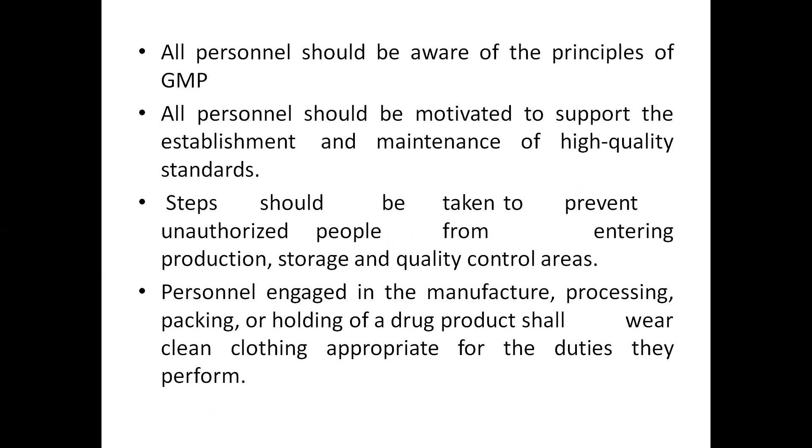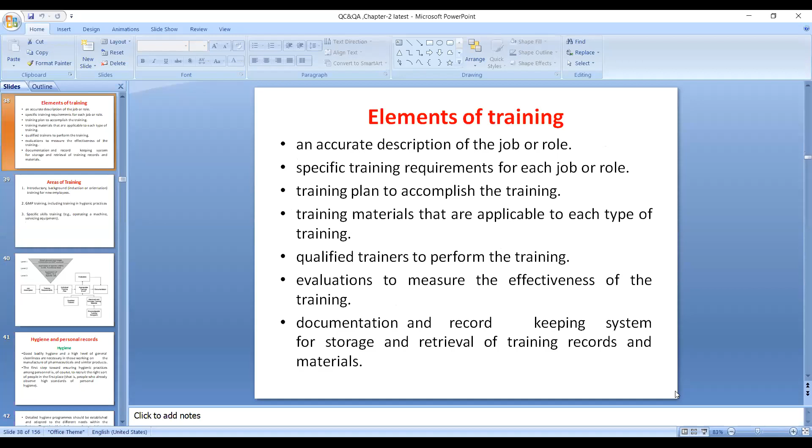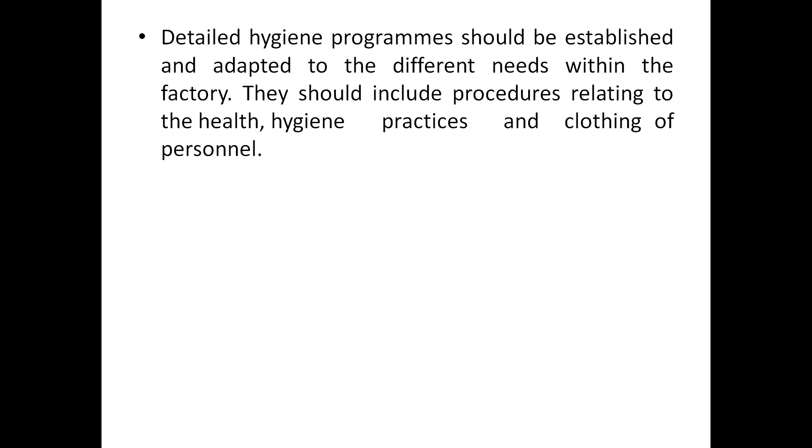A detailed hygiene program should be established and adapted to the different needs within the factory. It should include procedures relating particularly to health, hygiene practices, and the clothing of the person. Otherwise, if persons working in the pharmaceutical industry have any health issues, those things will interfere in the product also. That's the reason hygiene should be maintained.

Personal hygiene: all personnel who are working, prior to and during employment as appropriate, have to undergo health examinations, that means health checkups. Personnel conducting visual inspection should also undergo periodic eye examinations, not only other health checkups but including periodic eye examinations also.

All personnel should be trained in the practice of personal hygiene. A high level of personal hygiene should be observed by all those concerned with the manufacturing processes.

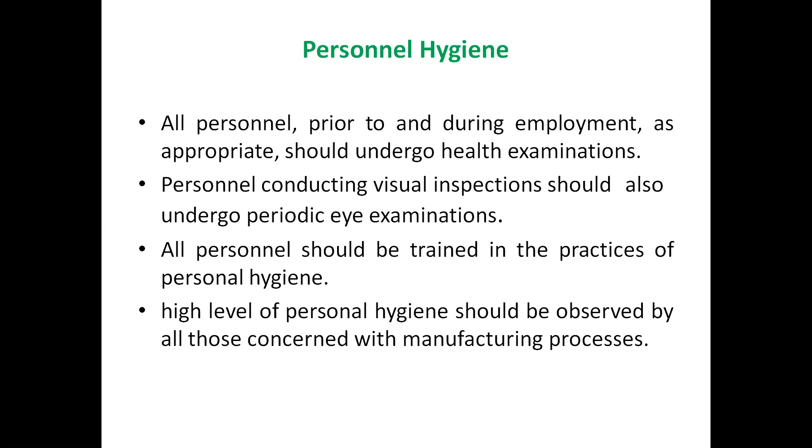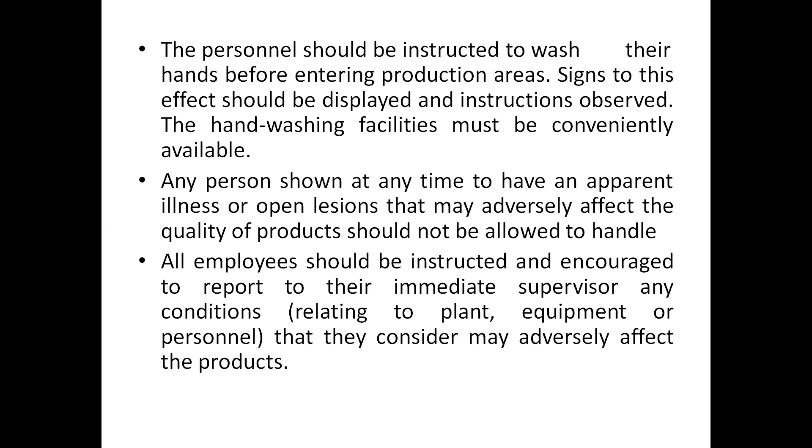Any person shown at any time to have an apparent illness or open lesions that may adversely affect the quality of the product should not be allowed to handle it. All employees should be instructed and encouraged to report to their immediate supervisor any conditions, relating to plant, equipment, or even a person, that they consider may adversely affect the pharmaceutical products.

Direct contact should be avoided between the person handling, that is the operator's hand, and the starting materials, packaging materials including primary packaging materials, and intermediate or bulk product. They have to avoid direct contact with the pharmaceutical products, packaging materials, the bulk products, etc.

They have to ensure protection of the product from contamination. Personnel should wear clean body coverings, appropriate to the duties they perform, including appropriate hair covering. Reusable clothing, if used, should be stored in a separate, closed container until properly laundered, and if necessary, should be disinfected or sterilized.

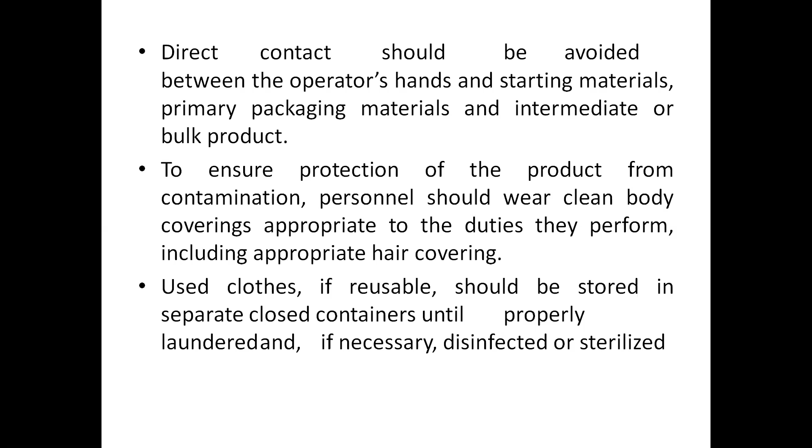This is very important for personal hygiene. Smoking, eating, drinking, chewing, and keeping plants, food, drink, smoking material, and personal medicines should not be permitted in the production areas particularly.

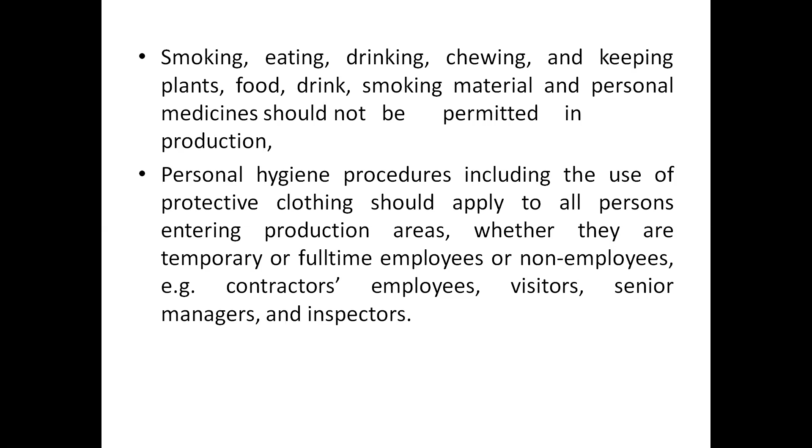Personal hygiene procedures, including the use of protective clothing, should apply to all persons entering the production areas, whether temporary or full-time employees or non-employees also. For example, contractors, contract employees, visitors, senior managers, and inspectors should all use protective clothing. It is applicable to all, not only the persons working in that particular area.

Hands, including nails, should be kept very clean and carefully washed after visits to the toilet. So hands should be clean for any person who is working; they should clean their hands, including nails, after visiting the toilet, before meals, before work commences, or when work recommences after a break. Every time there is a break, they have to maintain the cleaning process.

The necessity to observe good oral hygiene should also be stressed. Eating chewing gum and the ingestion of sweets or the like should be prohibited in the working areas.

Nowadays we are seeing many of them have the habit of eating something, chewing gum, or ingestion of sweets. Those things should be prohibited, particularly in the working area. The risk of contamination from nose and mouth can be controlled.

How? By not talking, you can control sneezing or coughing in the vicinity of the exposed products. Whenever products are exposed, the person working there should not cough or sneeze in that particular vicinity area. If they wear a mask, that's well and good. So the risk of contamination from the nose and mouth can be controlled.

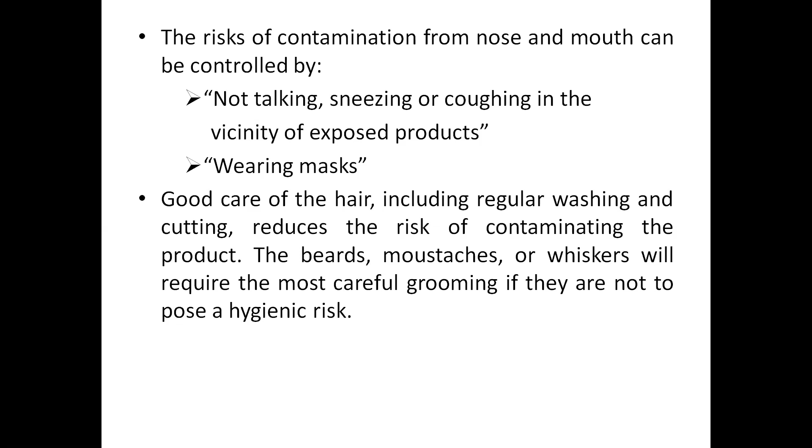Good care of the hair, including regular washing and cutting, reduces the risk of contamination. Even the person working should cut his hair, and also the mustache, beards, or whiskers. These require the most careful grooming if they are not to pose a hygienic risk, otherwise these hair things lead to contamination.

Coming to working clothes, particularly special protective clothing, it should be worn only within the designated work areas, not all areas. Even if you're going to the canteen, you should not wear it. Only in the designated work areas should you wear the working clothes or special protective clothing. The working clothes should be kept separate from the street clothes.

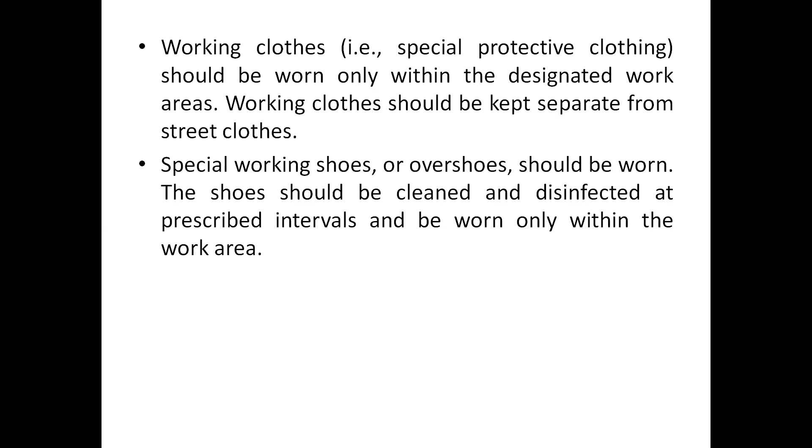Special working shoes, even overshoes, should also be worn in the industry. The shoes should be cleaned and disinfected at prescribed intervals of time, and should be worn only within the working area. Even if you want to go to any toilet, this should be avoided - it should also be within that particular work area.

Then coming to records - personal records. What records are required? Pre and post employment medical checks. That means before and after - whoever is employed in the industry, their personal record should be maintained. What minimum things are required? The pre and post employment medical checkups and even periodic checkups.

This is specifically important in case of eye checkups, skin and other infectious disorders - very, very important this point. And the personal training records also - not only health checkups, but personal training records on personal hygiene, good manufacturing practice, specific job training, motivation training, safety aspects, etc.

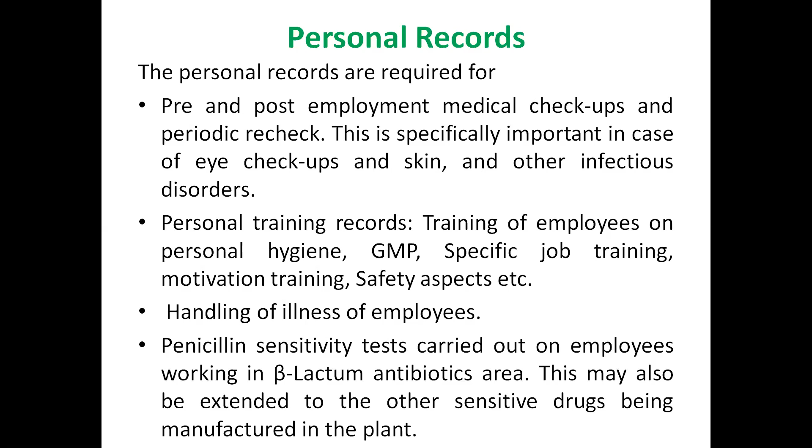So that's about the hygiene practice of industry persons. Now let us look into the drug industry location, its design, construction, and the plant layout. Premises must first be located, and they have to be designed, constructed, adapted, and maintained to suit the operations to be carried out.

Any building or buildings used in the manufacture, processing, packing, or holding of drug products shall be of suitable size, construction, and location to facilitate cleaning, maintenance, and proper operation.

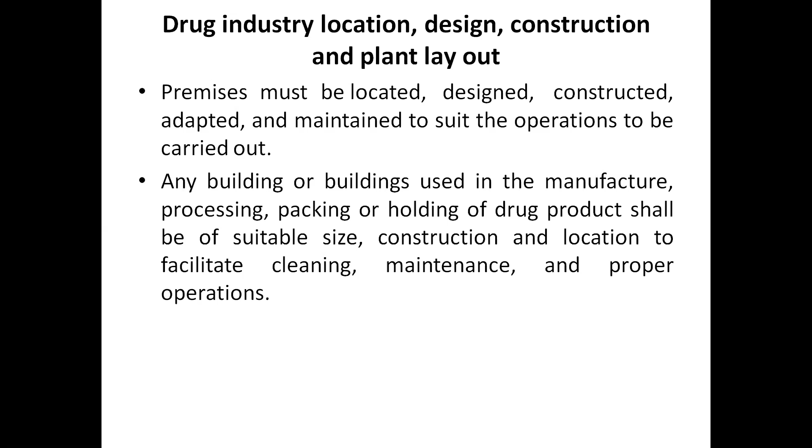Then the location of the drug industry. Selection of location for a drug industry is a very, very important decision - a vital decision because it determines the balancing of investment as well as profit. So the plant should be located where the minimum cost of production and distribution can be achieved.

Because if the plant is some 300 kilometers away from the city, distribution and transportation will cost more, and the profit margin will be less. It shall not be adjacent to an open sewage or drainage area or public toilets, and shall not be adjacent to any factory which produces disagreeable or obnoxious odor or fumes, or emits large quantities of dust or smoke.

So these are the few restrictions and prohibitions for the drug industry location. Otherwise, those things contaminate the product quality.

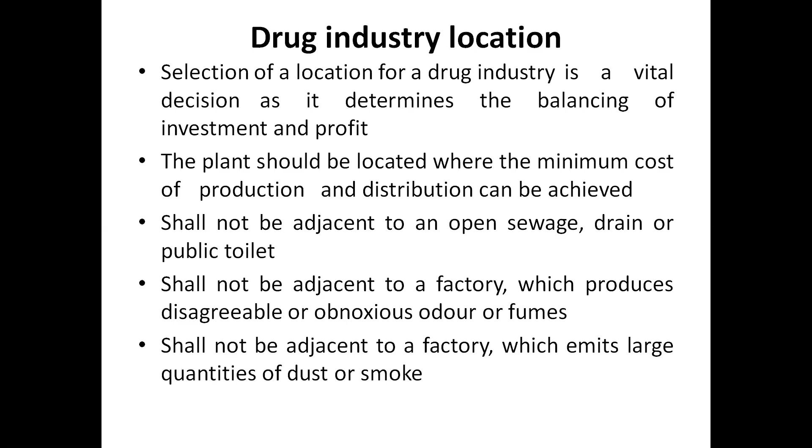Then what are the minimum requirements? It should have adequate space, sufficient even for future expansion if needed, and regional laws should allow anticipated development while restricting undesirable developments.

Then the availability of water is very important, both quality and quantity, and power. Fuel, sewage, and waste removal are also quite important requirements for any drug industry.

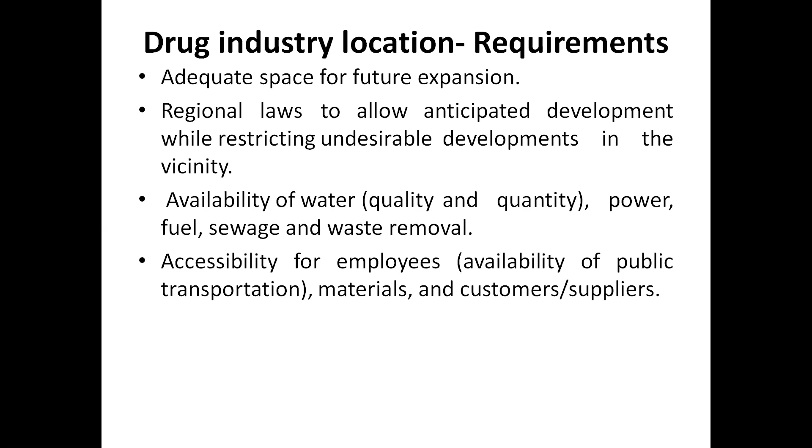And the accessibility for employees, meaning the availability of public transportation, materials, and customers or suppliers. This makes sense so transportation can be minimized, and suppliers and customers can easily approach and reach the site.

The most important is environmental issues such as site history, soil, water, air quality, geological and topological issues, and the potential for flooding, earthquakes, or foundation instability. They should look into topological and geological issues as well.

Then the proximity of undesirable activities that pollute or act as a source of vermin, insects, odor, or microorganisms. Other industries, disposal sites, or open mining should also be taken into account.

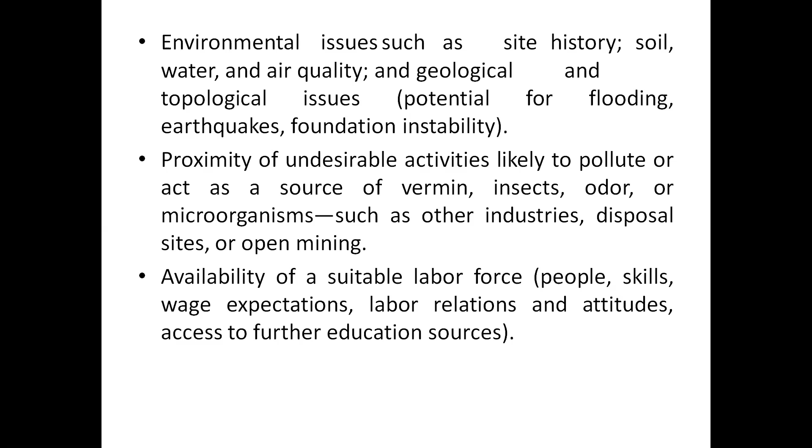The availability of suitable labor force: people, skills, wage expectations, labor relations, attitudes, access to further education sources, and also the ability to provide adequate security arrangements.

Proximity or accessibility to related operations in the company or industry, and marketing, internally produced intermediates or components. For example, R&D should have accessibility, as well as marketing and internally produced intermediates or components.

Then the political situation: government stability, trade policies, taxation, financial incentives, etc. That should also be looked into.

Then factors that influence the location. The primary factors include availability of raw materials, and market for products. After producing products, you have to market them - that is market for products.

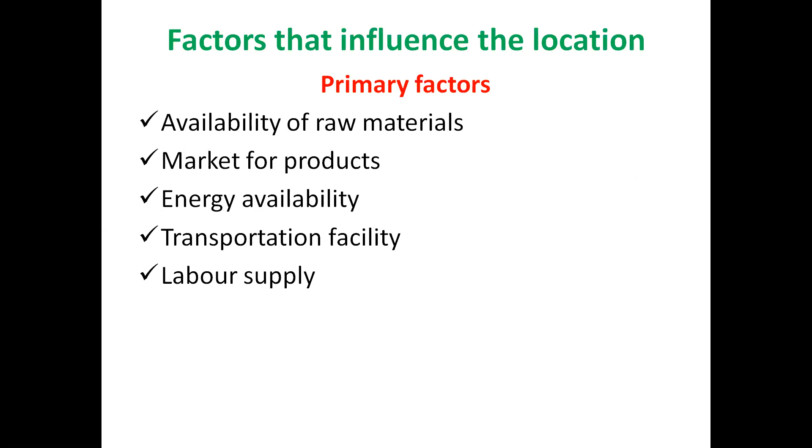Then energy availability, most importantly transportation facility, and labor supply. So these are the five primary factors: availability of raw materials, market for products, energy availability, transportation facility, and labor supply.

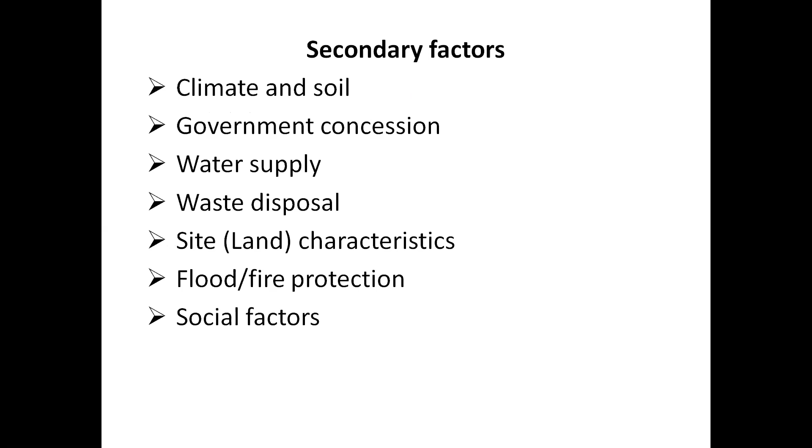Secondary factors, very important: climate and its soil, government concessions, water supply, waste disposal, site characteristics meaning land, flood or fire protection, then social factors. They are all secondary factors.

Then the site development plan. For a suitable location for the facility, the site development plan is prepared, and it will include compliance with appropriate laws and regulations, and any additional company standards.

Site resources and infrastructure such as amenities, green space and parking for employees and visitors' vehicles and delivery, distribution vehicles, road and rail accessibility, recreation areas, tank farms, and other external storage. These are few infrastructures required.

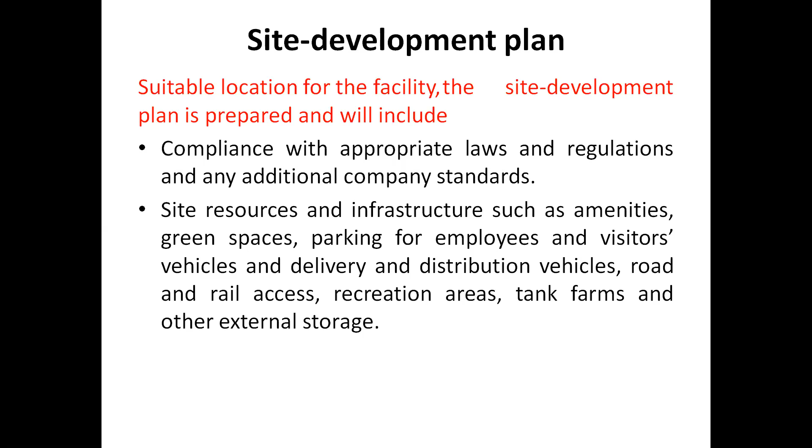That is site resources. Then storm water and waste management should be there. Site security and accessibility should be there, meaning fencing, posting guards, and keeping CCTV cameras installed.

Then building layout: usage, function, relationship for efficiency, possible expansion, and surface finishes.

Next comes the utilities. Utilities involve the design, layout, and backup, especially for critical utilities such as electricity and nitrogen for some chemical operations.

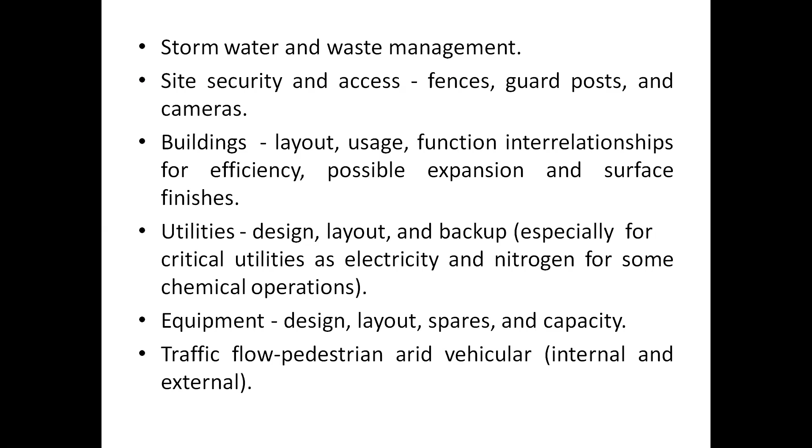And then comes equipment: design, layout, spares, and capacity. Then the traffic flow, which is pedestrian and road vehicular, both internal and external.

Then comes safety for personnel and equipment, containment of hazardous materials, sprinkler system, emergency egress, emergency services accessibility - very important safety aspects.

External architecture, for what? To take into account local environmental conditions like wind, snow, humidity, and aesthetic appearance, blending with local atmosphere, and comparative image.

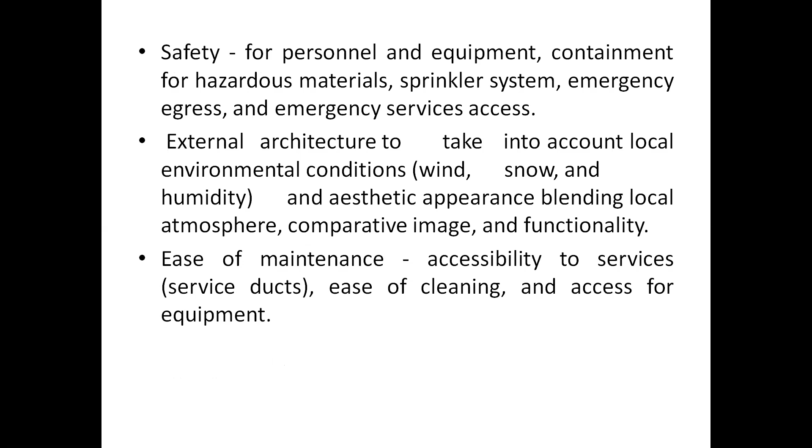Then ease of maintenance: accessibility of services such as service ducts, ease of cleaning, and access for equipment. These are the few things definitely required - storm water, site, building, utilities, equipment, traffic flow, safety, external architecture, ease of maintenance, and so on.

Then selection and use of experienced contractors, that also counts much. Then identification of project management responsibility, and validation plans with an effective change control procedure.

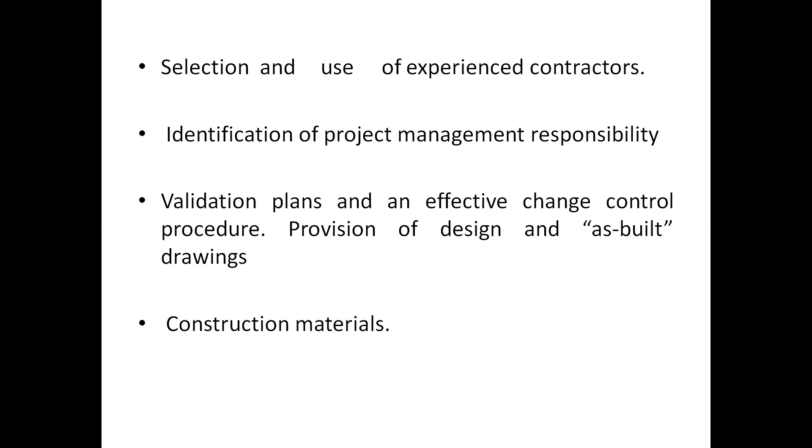Also provision of design and as-built drawings, and construction materials. Then comes the objectives of building construction.

What could be the objectives for any pharmaceutical building construction? Mainly to prevent cross contamination or mix-ups by providing adequate space, separation of operations, construction, maintenance, and adequate sanitation.

So in order to prevent cross contamination or mix-ups, how to control this? Prevent by providing sufficient space and separation of operations. Different operations can be taken up in different places, along with proper construction, maintenance, and adequate sanitation. This also keeps the building strong and durable, and helps maintain the safety and security of the building.

So how to make the building safe and secure? By providing fencing wires, laying broken glass pieces on the boundary wall, and keeping explosives and inflammable materials outside the factory building in separate enclosures.

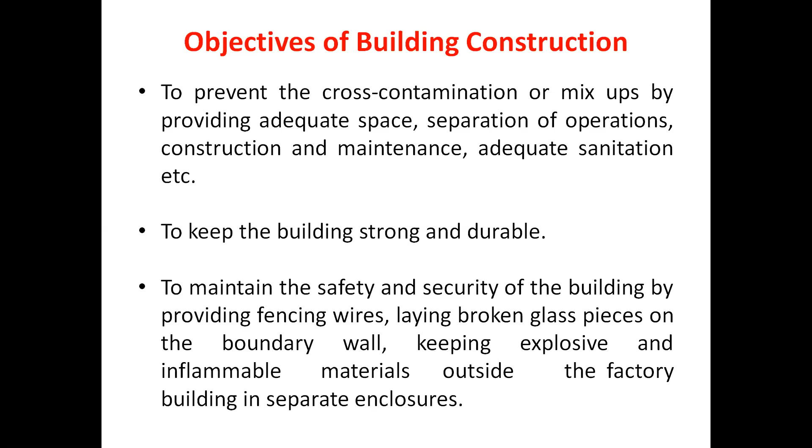Then exteriors should have good appealing colors, glass, and metal sections. General requirements for flooring, ceiling, and walls should be provided, all constructed with hard, non-porous, and non-shedding materials, not like a temporary structure.

Materials of construction should be able to withstand hot water and even detergent cleaning operations, because plenty of times we make use of detergent cleaning water for cleanliness and hygiene provisions.

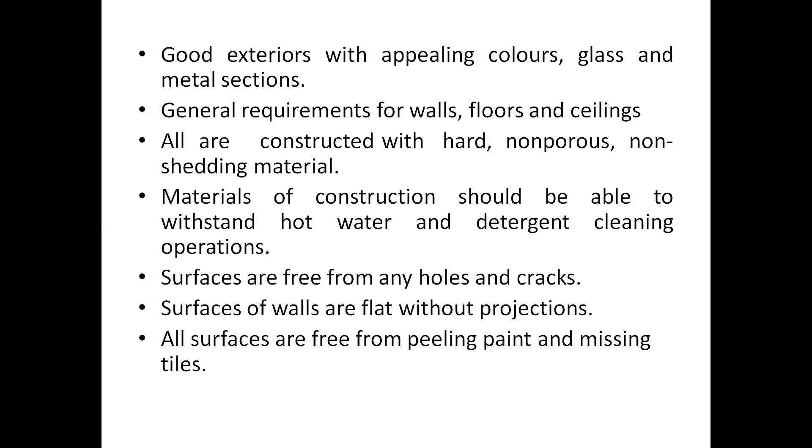Surfaces should be free from any holes, cracks, or breaks. The surface of walls should be flat without any projections, and all surfaces should be free from peeling paint and missing tiles. Then let's look at the construction materials, particularly for walls.

Let's look into what materials can be used for construction of the walls. The position of walls should provide an orderly movement of materials and personnel.

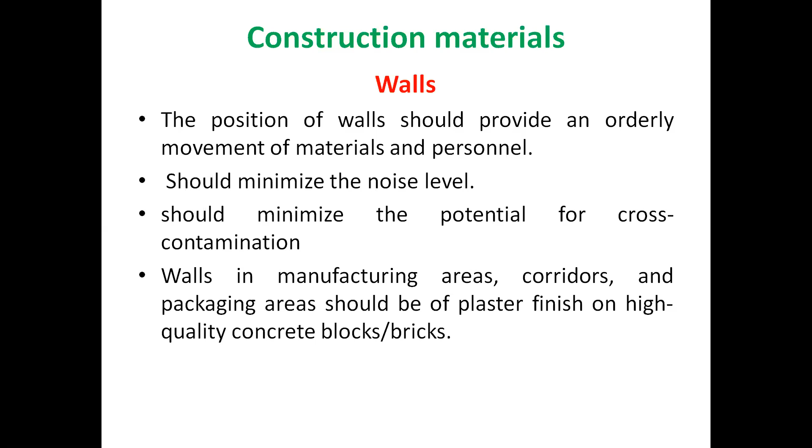It should minimize noise levels and minimize the potential for cross contamination. Walls in manufacturing areas, corridors, and packaging areas should be of plaster finish on high quality concrete blocks, with a very smooth finish.

Walls are usually finished with enamel or paint, and prefabricated partitions may be used in packaging areas where flexibility of layout is important. Prefabricated units with minimum panel joints are used in sterile areas. Projections on walls should be avoided - very important.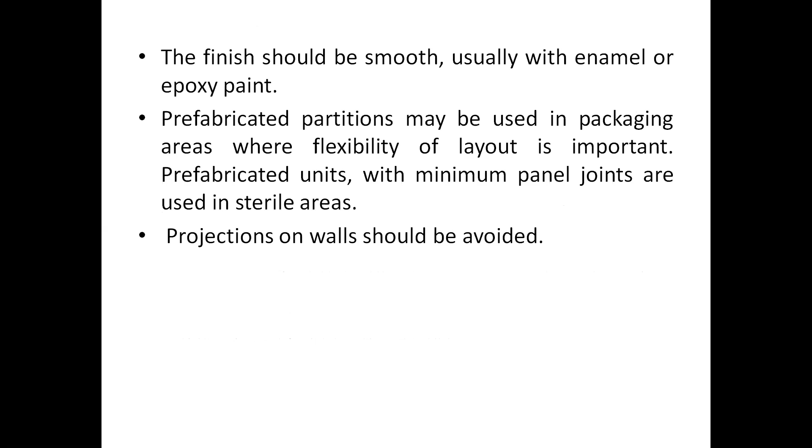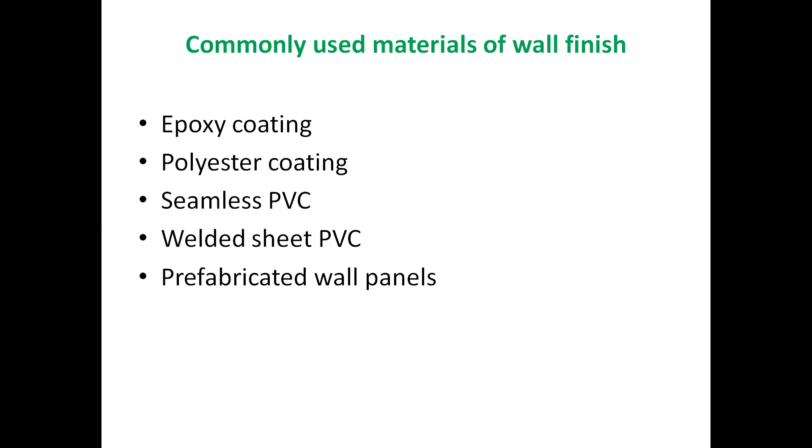What are the commonly used materials of wall finish? That is epoxy coating, polyester coating, seamless PVC, welded sheet PVC, and prefabricated wall panels. These are the commonly used materials for finishing of the walls.

Now let's look into floors. Floor covering should be selected for durability as well as cleanability and resistance to chemicals with which it is likely to come into contact many times. The floor should be durable and as clean as possible, and also resistant to chemicals it is likely to contact.

Tiles or poured-in-place finishes are available. There should be effective sealing between the tiles to prevent dirt and microorganisms. Otherwise, if there are gaps in the tiles, there will be entry of microorganisms or dirt, leading to contamination.

Vinyl sheeting provides an even, easy to clean surface as it has no joints. Epoxy flooring also provides a durable and readily cleanable surface.

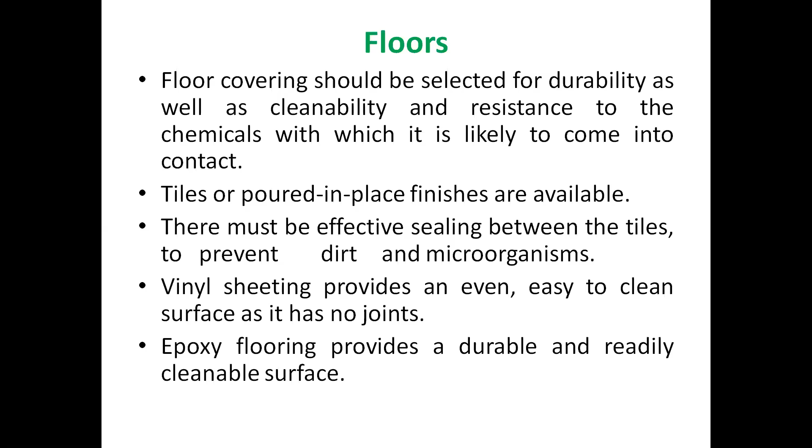Typical floor finishes include paint finish over concrete, vinyl or tile sheets, welded seams, epoxy, and polyurethane, etc. So these are the few things for floors and walls.

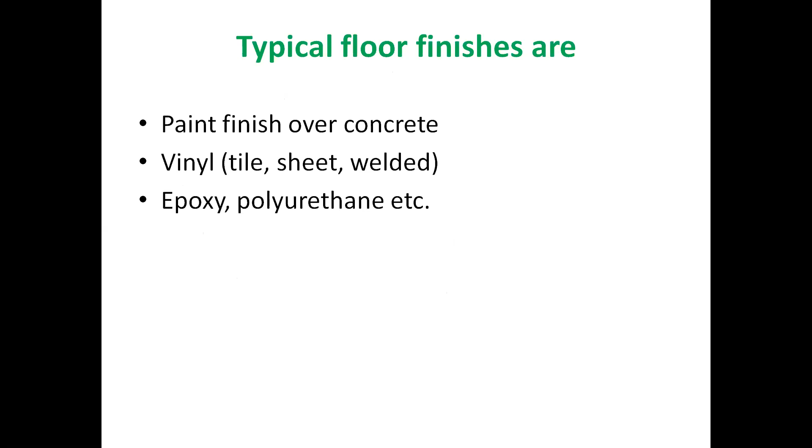Let us look into ceilings. Suspended or false ceilings are also very important. They are all made up of non-brittle, non-friable, non-asbestos, and non-combustible material, and may be provided in office areas, laboratories, toilets, and cafeterias.

Manufacturing areas require a smooth finish, often of seamless plaster or gypsum board. All ceiling fixtures such as light fittings, air outlets, returns, PA systems, and sprinkler heads should be designed to assure ease of cleaning and to minimize the potential for accumulation of dust.

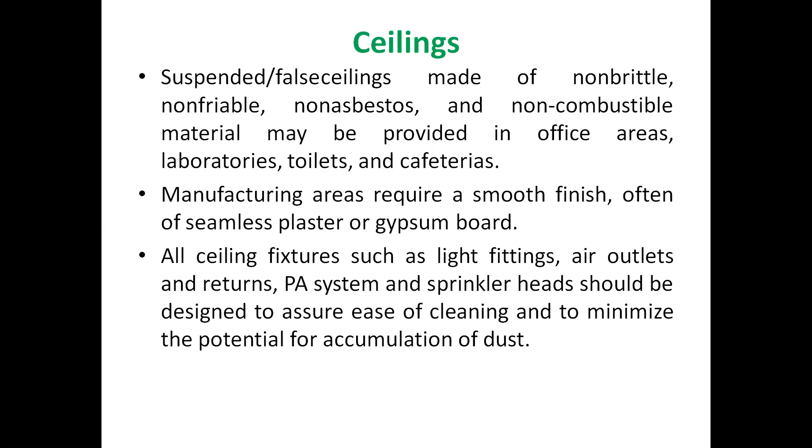What finishing materials can we use for ceilings? Simple painting, or covered by gypsum plaster - you can finish even gypsum board coated with epoxy resins, polyester, and seamless PVC.

Now for services, in building design, provision should be made for water, steam, drains, electricity, and other services to allow for ease of maintenance. Access should ideally be possible without disruption of activity within the actual rooms which are provided.

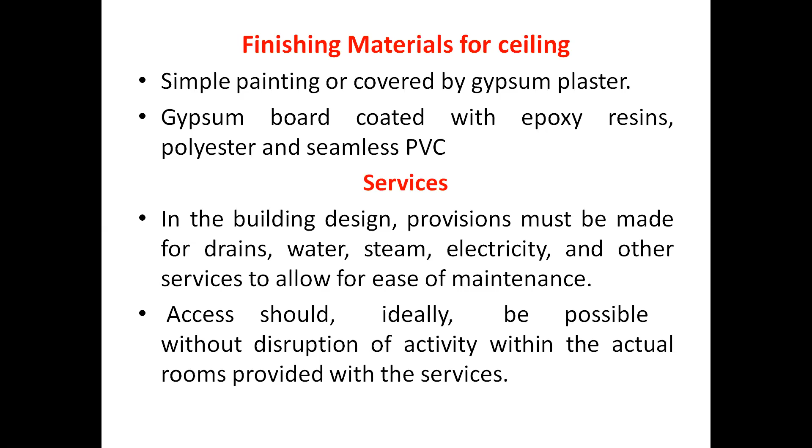Just have a look here at the design principles, an example of materials and people flow, how the persons will exit. So here a small example is given: design principles for arrival of goods. In any industry, first we go there for arrival of goods, then another area for raw materials and packaging storage, both can be done there. Just see the layout plan, different zones have been given.

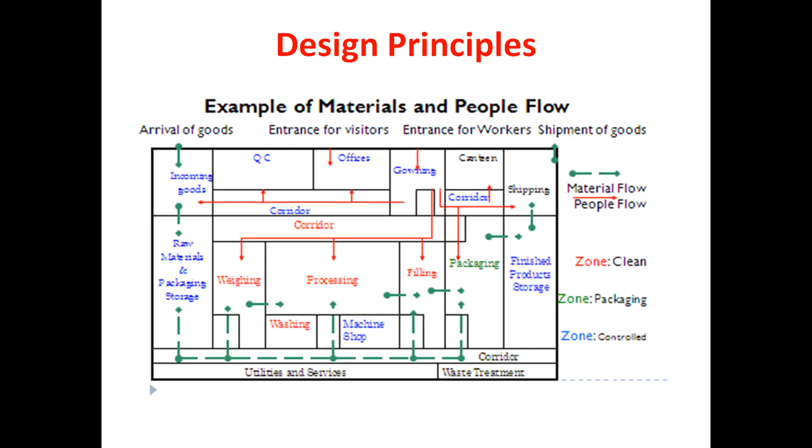Material flow and people flow are all given very clearly: quality control department, offices, gowning, corridors, weighing, processing, washing, filling, machine shop, finished products storage, packaging, canteen should be there, shipping, utilities, services, waste treatment, and so on. This is a very simple design principle for materials and person flow.

Process flow - let us look into this. Process flow is the sequence of events that will take place in a process, that's called process flow. And material flow is the routing of materials throughout the facility.

It's important to show the status of the materials as well - this means indicating whether they are quarantined, approved, or rejected, and also the volume, weight, or frequency of movement, and the way in which the material is to be. Material flow is very, very important.

Then people flow - the routing taken by people when they enter the factory, when they move around in the factory from one department to another, and when they leave the factory. So each and everything has been given in the design principle plan, how people will move from one area to another and exit also.

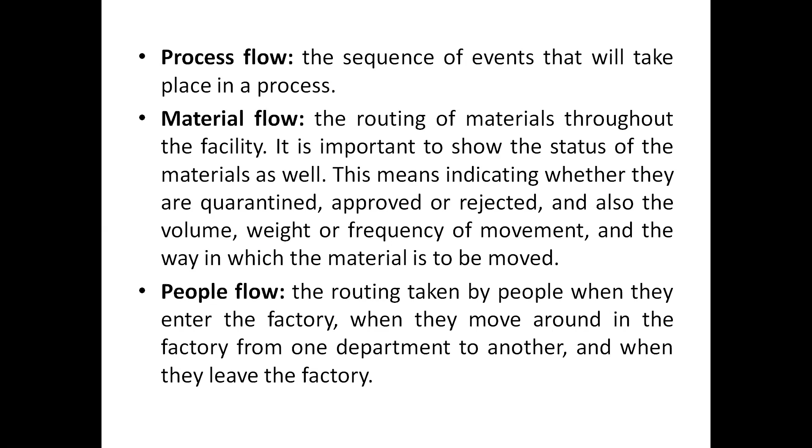Then premises design, very, very important for all manufacturing pharmaceuticals, that means the pharmaceutical industry. The important areas required are: number one, production area; storage area; weighing area; quality control area; and ancillary areas. These are the prime areas in the premises design.

Let us look into the production area. This production area should be dedicated and self-contained facilities must be available, to minimize the risk of cross-contamination.

The layout should be in the sequence of operations, and there should be adequate working and in-process storage space. The interior surfaces - walls, floors, ceilings - should all be very smooth and free from cracks as well as open joints, and should not shed any particulate matter, and should permit easy and effective cleaning. In such a way the interior surfaces should be there, along with in-process storage space and other operations, to minimize the risk of cross contamination in the production area.

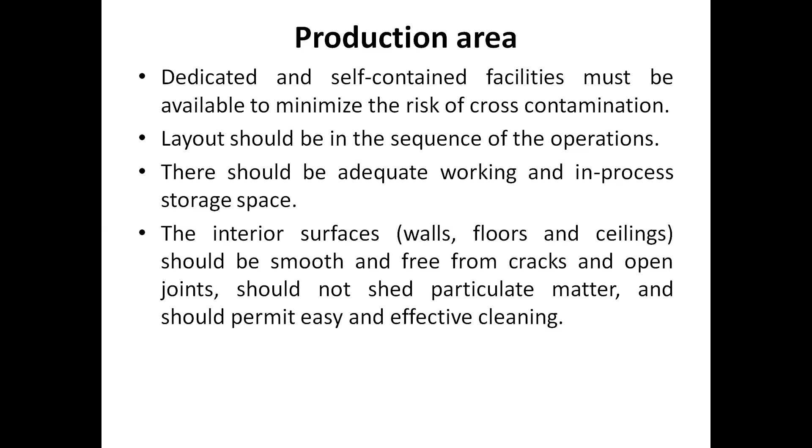Then the pipe work, light fittings, and ventilation points should be designed and fixed in such a way that they are easy to clean as far as possible, and also for maintenance purposes, and they should be very much accessible outside the manufacturing area. Pipe fittings - what are those? Light fittings, ventilation points, and pipe works.

Then the drains - the drain should be of adequate size and design, with proper size and adequate suction, and it should be designed and equipped to prevent any backflow. It should have that capacity to prevent backflow, and should be designed for easy cleaning and disinfection. In such a way the drain should be designed.

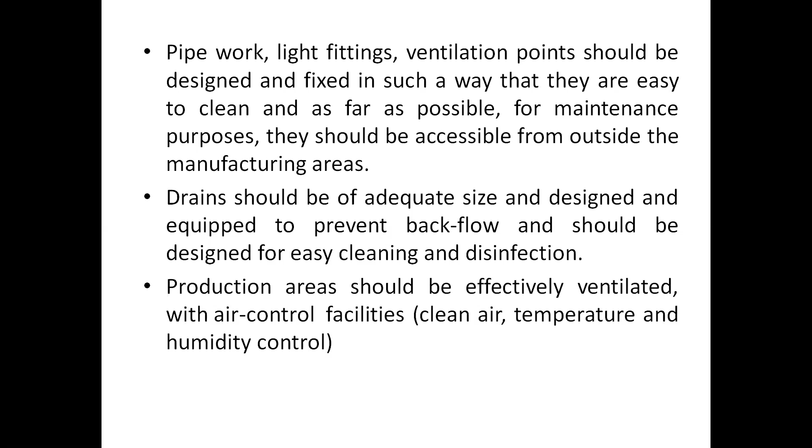Production areas should be effectively ventilated always with air control facility - that means clean air, temperature, and humidity.

Premises for the packaging of pharmaceutical products should be specifically designed and laid out so as to avoid mix-ups or cross contamination. Here also there is a lot of risk of cross contamination because of the packaging materials involved. That's the reason premises for packaging of pharmaceutical products should be specifically designed and laid out to avoid mix-ups or cross contamination. The production area should be well lit, particularly where visual online controls are carried out.

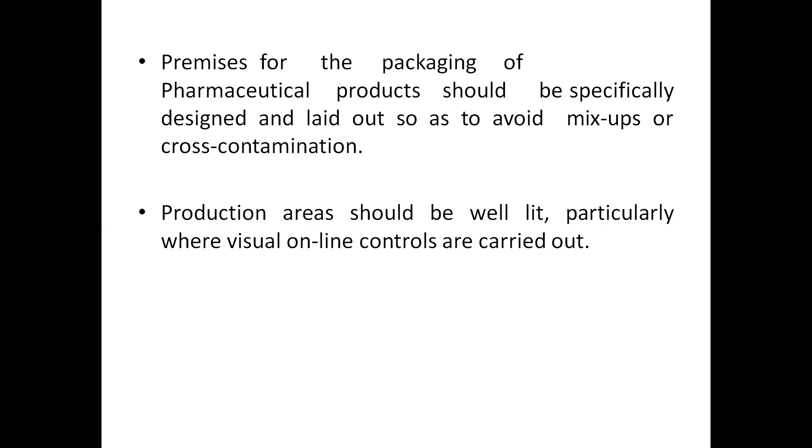Then storage areas - these should be of sufficient capacity to allow orderly storage of various categories of products with proper separation. That means raw materials should be kept separately, solids should be separate, liquids should be kept separate, and packaging materials too, because it's a very big area wherein you can separate things, segregate and quarantine them, and release materials when required, including rejected, returned, or recalled products. So storage area is also a very prime area, and we should have sufficient capacity to allow most categories of materials at the industry.

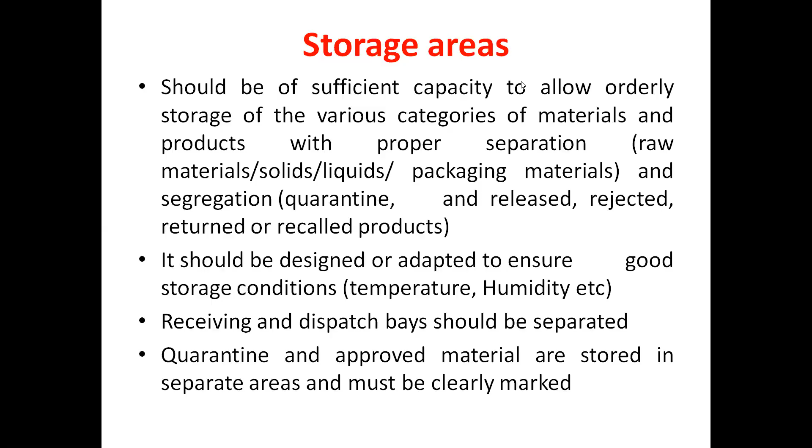It should be designed or adapted to ensure good storage conditions. The main important factors are the temperature as well as the humidity. Then receiving and dispatching areas should be separated. Quarantine and approved materials are stored in separate areas and must be clearly marked.

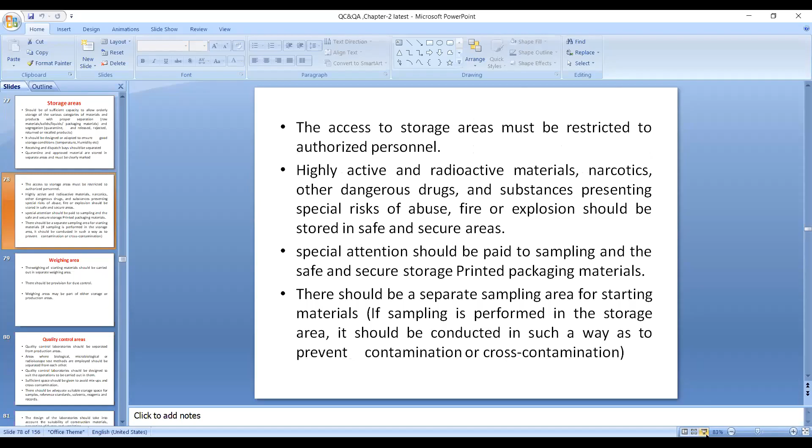Access to storage must be restricted to authorized persons only. Authorized personnel access to storage must be restricted to authorized persons.

Highly active and radioactive materials, narcotics, or any other dangerous drugs and substances present the risk of abuse, fire, or explosion. They should all be stored in safe and secure areas.

Special attention should be paid to sampling and the safe and secure storage of printed packaging materials. Since information is printed on the packaging material, you have to take much care. Special attention should be paid for that, and there should be a separate sampling area for starting materials.

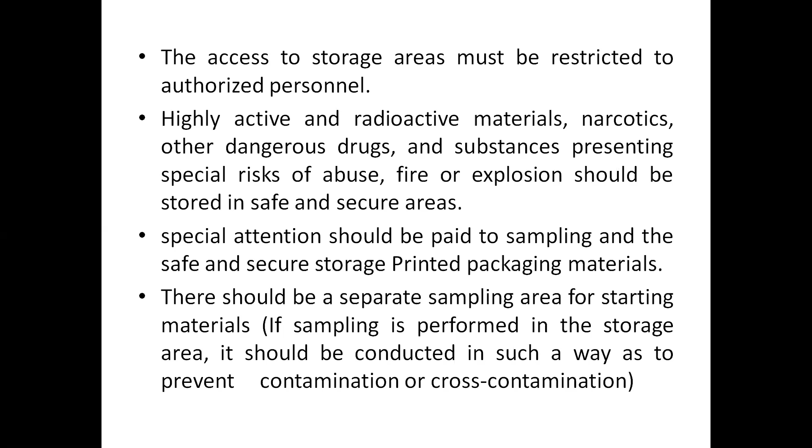As I told you, various categories of drugs should be segregated and kept separately - liquids, solids, raw materials, products, anything. There should be a separate sampling area for starting materials if sampling is performed in the storage area, and it should be conducted in such a way as to prevent cross contamination. That is a very brief overview about the storage area.

Now let us look into the weighing area. Weighing of starting materials should always be carried out in a separate weighing area. You cannot carry out weighing wherever you desire - that is not permitted. Only in the weighing area should you weigh the materials. There should be provision for dust control also, and weighing areas may be part of either the storage or the production area.

Then the quality control area is very, very important. Quality control laboratories should be separated from production areas and should not be mixed with any other department. Areas where biological, microbiological, or radioisotope test methods are employed should be separated from each other.

The quality control laboratories should be designed to suit the operations to be carried out in them. This is a very prime area because all raw materials and even finished products are tested here only, and they must assure everything. That is why quality control is a very important area.

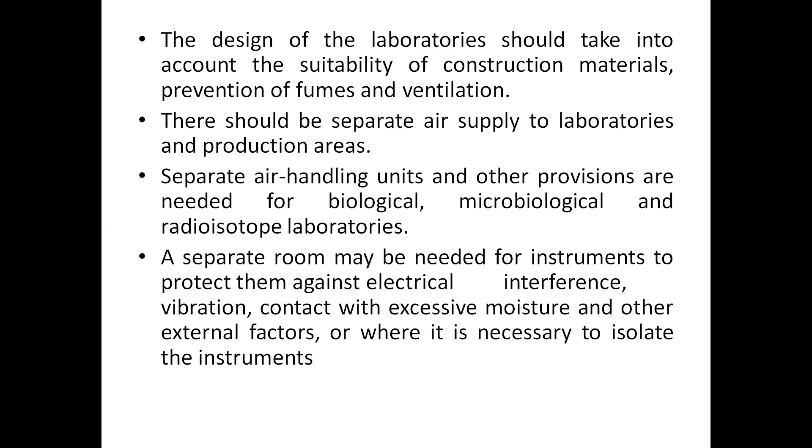There should be a separate air supply to laboratories as well as production areas, with separate air handling units and other provisions needed for biological, microbiological, and radioisotope laboratories. A separate room may be needed for instruments to protect them against electrical interference, vibrations, contact with excessive moisture, and other external factors, or where it is necessary to isolate the instruments. These are the few things to be taken into account in quality control areas.

In ancillary areas - what exactly is ancillary? It means rest and refreshment rooms should be separate from the manufacturing area. Facilities for changing and storing clothes, and for washing and toilet purposes, should be easily accessible and appropriate for the number of users.

Toilets should not open directly into production or storage areas - they should be kept away from that. Maintenance workshops should, if possible, be separated from the production area. Whenever parts and tools are stored in the production area, they should be kept in rooms or lockers reserved for that use. Prior precautions should be taken.

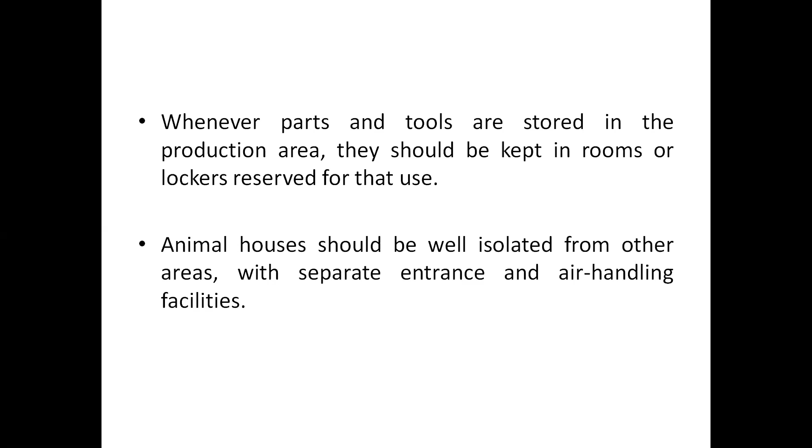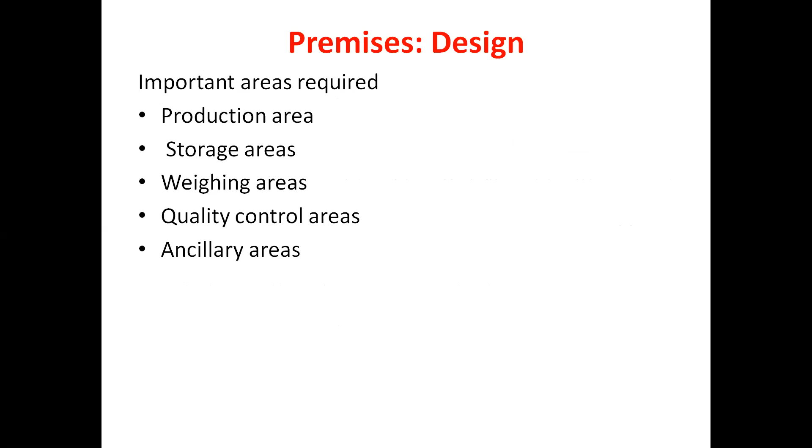Animal houses, if present, should be well isolated from other areas with separate entrances and air handling facilities. So that means we have seen the different areas - premises design including production area, storage area, weighing area, quality control areas, and ancillary areas.

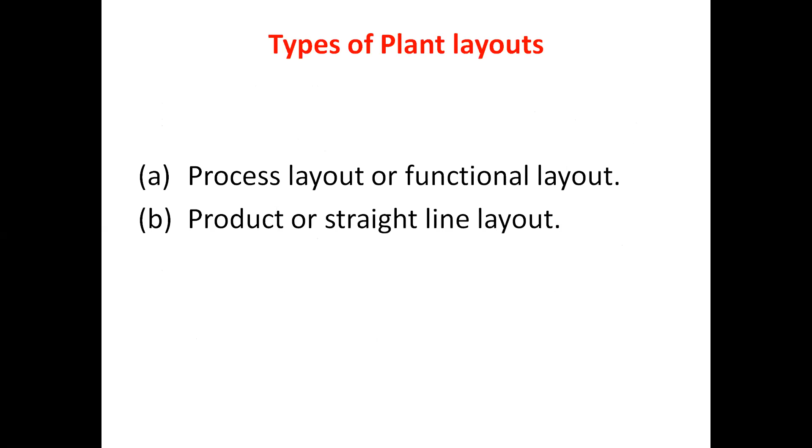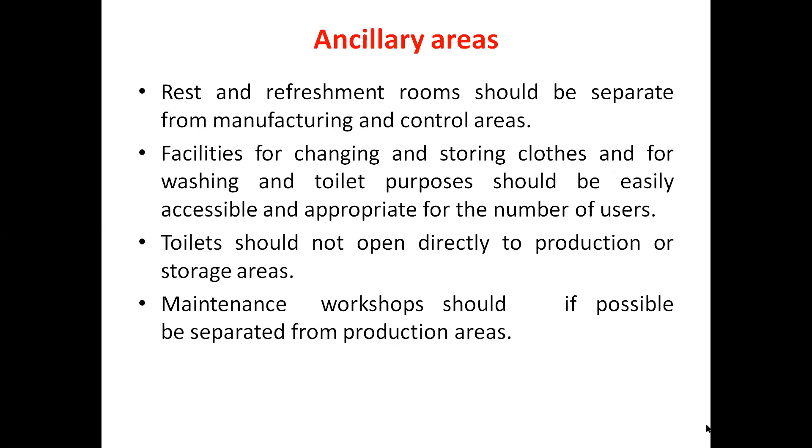Then in the next class, let us see about plant layout and types of plant layouts - layout, advantages, disadvantages, and other things. The references and other things can be given at the end of this chapter. Thank you very much.